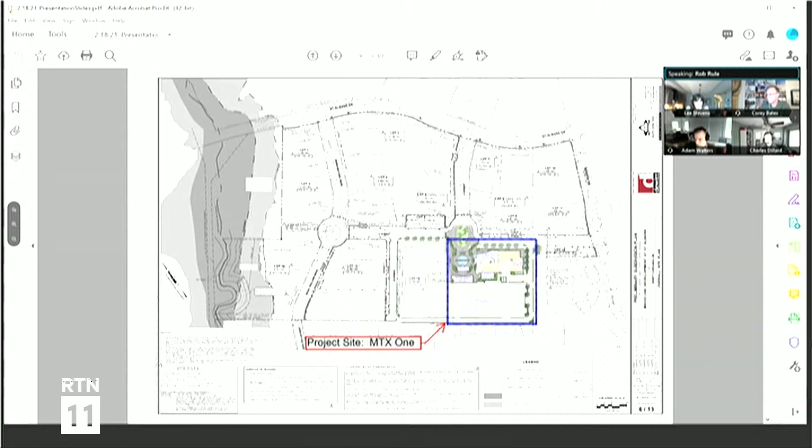As you move around to the right of the motor court, to the east, is the main entry, where the lobby is in the light yellow color. Most everybody from the parking deck would come through that area to the office building, passing an outdoor work area space, a small pocket park labeled on the plan, and get into the office lobby space.

And then they would come around into the main building circulation from there. In the darker tan area is the retail space that basically, for all intents and purposes, on every publicly viewed side of this project, there's active space on every street front with floor-to-ceiling glass.

In the case where the lobby is, it's 30 feet tall. You'll also notice on this plan that the building is not a simple rectangle. The building has bends in it, it has notches in it, and those are very important areas we're creating for outdoor gathering spaces. The one on the far right, for instance, off the retail, can become an outdoor dining space.

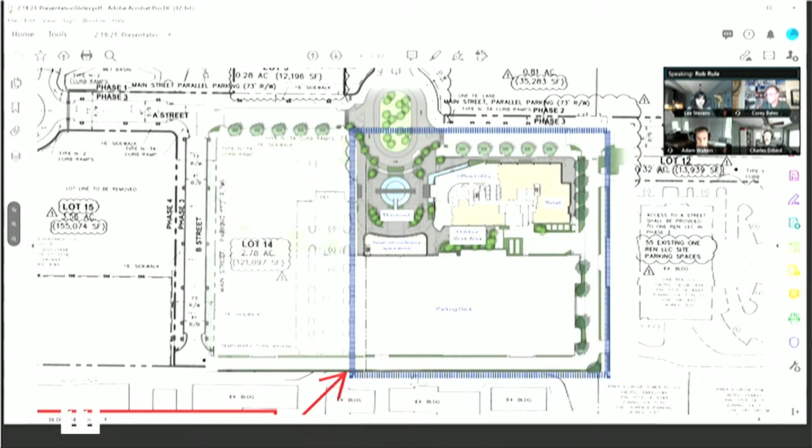And then all along the northern frontage, there's actually a recess. The glass is recessed behind the columns. We've got exposed columns there, nicely wrapped in architectural pre-finished metal finishes, and there would be cover there, so there could be some cafe tables and chairs and seating and lighting and all the things you like to have along a nice street environment with a wide sidewalk.

And then as you come back over to the office lobby, you can see the big bend with the glass line pulled back, creating an outdoor space in the dark gray area. The idea is that the indoor and outdoor space are blended here. In fact, the glass is so transparent here, we want this to feel like the indoor and outdoor are one. As you drive up from the motor court, you can actually see right into the lobby, and you'll see that curve at the core element.

That's going to be something pretty special. You've probably seen the renderings. We're making this a very sculptural, wonderful element, especially in the evening, but in the mornings when people arrive, it's going to be a really well lit space that's very transparent and exciting. A lot of energy and lots of people moving through from the parking deck all around that element every day, in and out. A lot of movement going through there, which is going to be great.

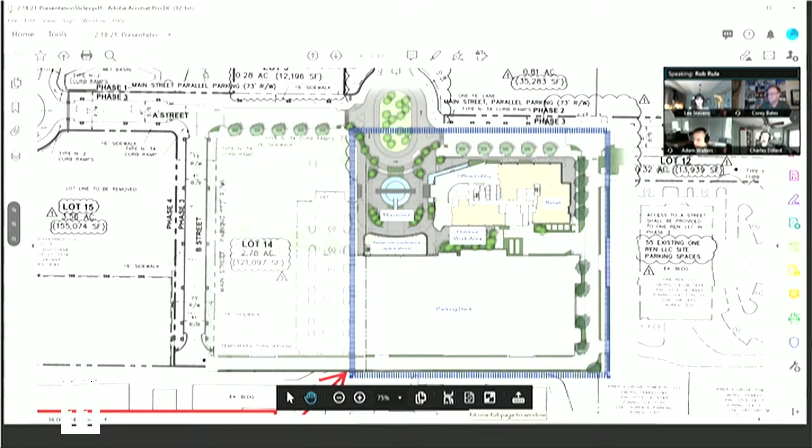So that's the site. If we want to move to the next slide, there's an elevation we can look at, and even some renderings. You can flip through those as you would like. Maybe the elevation would be a good point to start if you want to zoom in on that.

What I'll talk about is the building itself is a very sculptural composition. Although it's done in a very untraditional way, it does have a base, middle, and a top. You can see the base. The base is very clear.

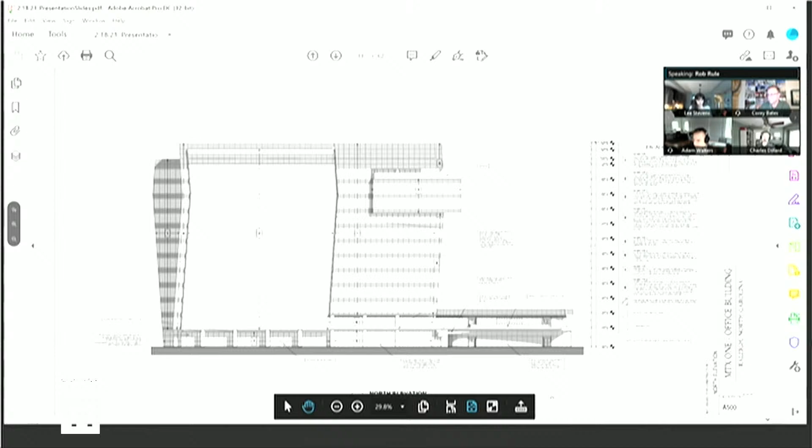We've recessed the first floor glass, as I mentioned. You saw that in the plan. You see the expressed columns. You see that some are 1 story, some are 2 stories. You see the canopy. There's a lot of visual interest with shadowing and with depth at the base.

And as it comes around the motor court, you can see that 2-story space with the canopy, with the terrace that sits above it, where the conference space is on the right-hand side of this drawing. Lots of interest, articulation, shadow lines, materiality with metal and glass, and there's even a little bit of a stone base you can't quite see here, but at the very bottom couple feet, there's actually really nice, beautiful granite down there. So there's a lot of rich materials, and it does have a base.

Then of course the middle has fairly conventional components with a combination of glass curtain wall on the right portion, and then also glass window wall with precast horizontal banding, but done in a very unconventional way as the building undulates as it moves up. It bends vertically the same way you saw it bend horizontally in plan, but it has vertical bends on multiple sides of the building.

And then the top is also very unconventional as well, but it does have a top. It's not your conventional cornice or top hat, but it does reach up, and the top floor is recessed. On the right-hand side, there's a dramatic inset area creating an outdoor, essentially not a rooftop terrace, but it's the top floor terrace, kind of like a rooftop terrace. But that's supported by shifting the building, letting the building move out on the 2 floors below that, and shifting off the grid, if you will, and becoming something so significant it becomes what your eye's drawn to.

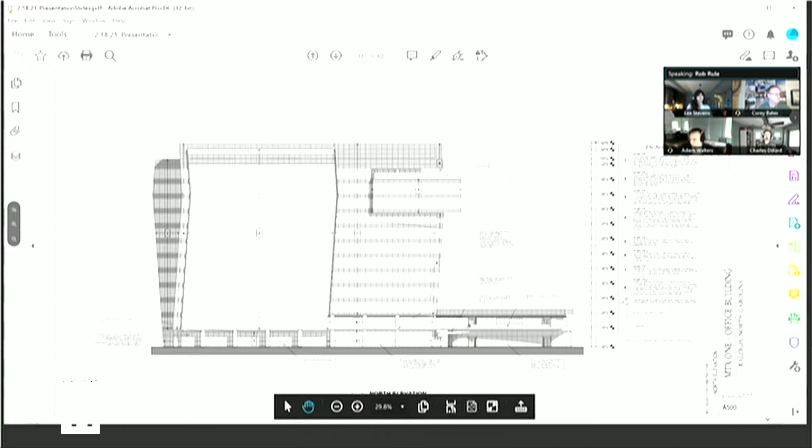So obviously the massing of the building—please do flip through these renderings at your leisure. But obviously the massing was conceived for this project without the UDO prescribed step back that was mentioned along the northern face. The only place where it's required would be along the northern face, which is the left-hand side of the view we're seeing right there.

But what I would tell you is that I am confident that the design meets the intent of all of the administrative alternate findings. Most notably, I would contend that the building does not degrade the pedestrian comfort level at the ground level in terms of wind and sunlight, which are the two criteria mentioned in the UDO. The reason I say that is we've actually studied the effect of these bent building planes, both in the vertical and the horizontal direction, and the effect they have on wind and sunlight.

We've looked at solar studies, and we've looked at wind tunnel testing. We've compared a building like this with the bent planes to a rectangular footprint of what the UDO prescribes by right, and compared the two.

And what we found is, when you look at those kind of strategies that were employed on this building, by right we could have a 20-story building that's a rectangle on this site, sitting on this corner. It could be 8 stories taller, and albeit we could incorporate that step back anywhere between the 3rd and the 8th floor, or 3rd and 7th floor.

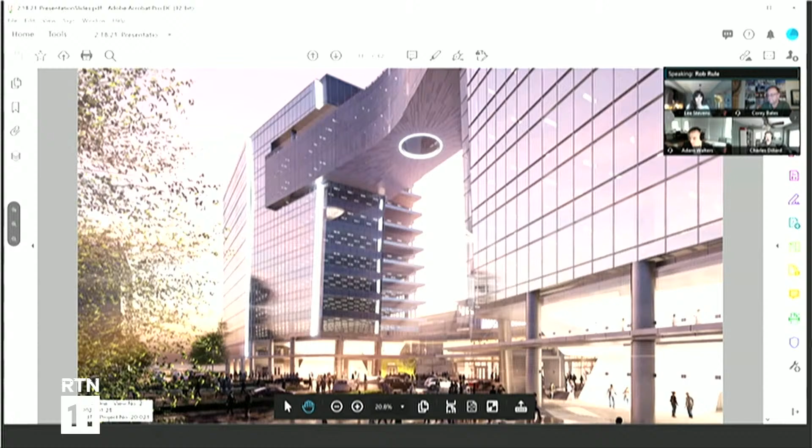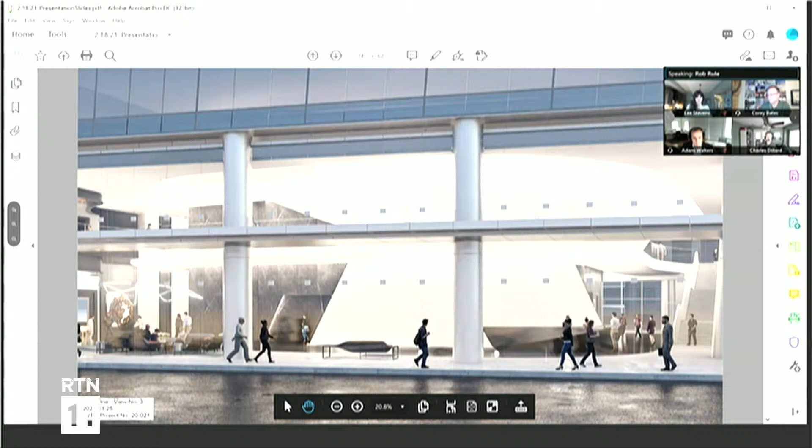And so we think that helped us with the strategy of coming up with something we wanted. We're looking for an iconic building, one that has this sculptural drama that we have here, something that addresses a potential phase 2 in a meaningful way as well, but still holds up as a phase 1 only building. It works both ways, and that's the beauty of this design.

So that's one thing. The other thing that was talked about was the transparency, and subsequent to the submittal of our application, we have been working with Viracon, who's the glass manufacturer and supplier, and an internationally known brand. Many of you as architects know who they are and you've dealt with them. What we have actually determined, and they've looked into this now, we just got word as of latest today.

Basically, we found out that we really don't necessarily have an issue, a technical issue that we need to ask for an alternate finding on. While the glass we submitted is technically only 76% transparent, which is 4% less than the prescribed 80% by the UDO, its reflectance is only 12%, which is 3% less than the prescribed UDO at 15%.

So what Viracon has done is analyze that, and they've said that the influence of a small percentage of reflectance has a greater impact on overall visual clearness of glass, the visual transparency, than a small percentage of the visible light that actually goes through the glass, which is what the measure of transparency is. So these are all technical terms.

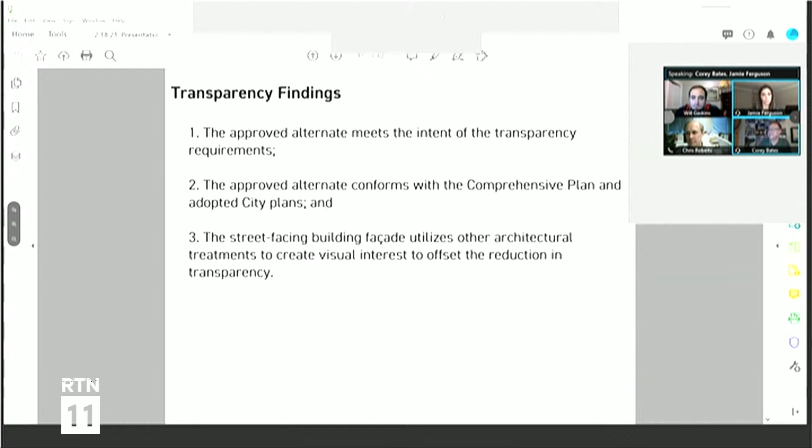Let's go ahead and look at our building massing.

All right, so we have 5 findings here. The approved alternate meets the intent of the building massing regulations. The intent of the building massing regulations is to manage the impact of tall buildings located near public right-of-way. Step backs are intended to provide access to light and air, street level mitigation, wind impacts, produce a consistent street wall, and visually reduce the perceived scale.

Again, I think with the angle and everything, we're all in agreement. Yeah, I'd actually like to commend that design team for engaging somebody to look at the wind and the wind tunnel effect for this project. As you can see, when phase 2 comes along, that could be a pretty big concern, especially with having outdoor balconies for the conferencing space and things like that. So well done. Yeah, thanks, Chris, for that.

Let's look at number 3. The approved alternate uses a change in building materials to mimic change in wall plane. The most substantial and durable materials are located at the bottom floor. Of course, we have those nice columns, kind of a nice base at the bottom, window setback. If the approved alternate proposes a building setback behind sidewalk in lieu of a required step back, the resulting open space includes public amenities such as seating areas, trees, and landscaping, outdoor dining, which it does. Building contains architectural treatments for delineating the base, middle, and top of the building, which Jamie has alluded to earlier, which I agree as well.

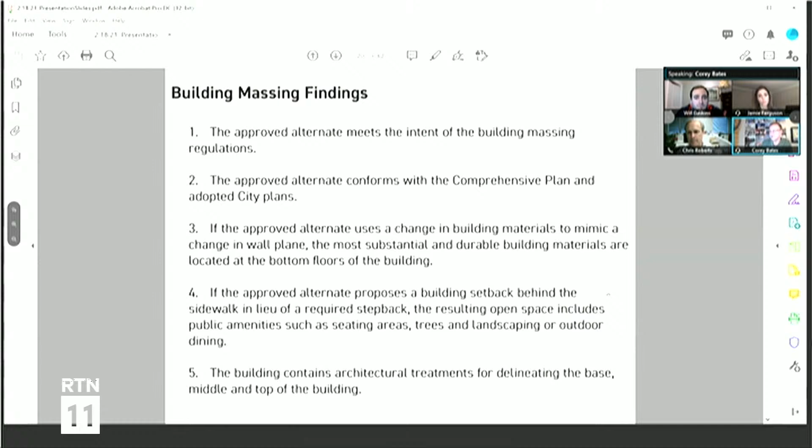So back to the approved alternate meets the intent of the comprehensive plan. Can we substantiate that with some policies as well? Policy UD 1.3, attractive facades. UD 1.2, architectural features. LU 2.1, placemaking. UD 2.4.

Okay, all right. With that being said, do we have a motion? I'll move to approve. Second. We have a first, and Jamie is a second. All right, all in favor? All right, any opposed? Being none opposed, they are approved. We appreciate it, great project. We appreciate you bringing that in front of us today.

All right, let's move right into AAD, case number 2, AAD 4-21. It's 3201 New Bern Avenue. We have, I believe, one participant, Marty Lynn, as the applicant today. And Lee, are you also presenting this one as well? I am, yes. Thank you, Chair. So 3201 New Bern Avenue is here for an alternate for vehicle parking lot landscaping.

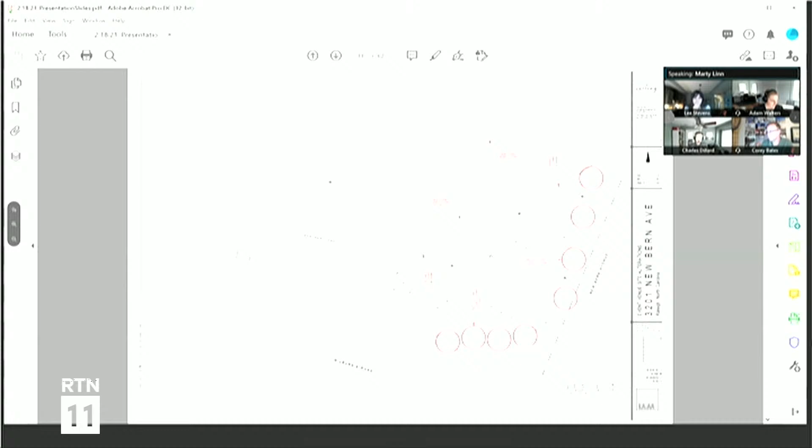So I'll reference the last plan in the set that was provided to all of you, which has the trees that would normally go in those islands shown in red, dashed red circles. You can see that we're proposing to relocate those trees to the edge of the parking lot, as shown by the circles that are not dashed, the thicker lined red circles. Those are where we're proposing to move the 8 trees that are impacted by the existing floodway.

As Lee said, also to respond to having those trees come out of those islands, as we're proposing, we plan to put in a very low level ground cover, a viney kind of ground cover. I think we submitted that we would consider something like a euonymus, a winter creeper type ground cover that will handle any potential erosion issues related to those islands, and also provide some aesthetic in terms of greenery to the parking lot.

So with that, that's basically the gist of it. Great, thank you, Marty. Any questions for the applicant from the commission?

Yeah, I just have one. Looks like the 4 plants south are pretty close together compared to the ones on the east. Is there any reason why those are bunched closer versus maybe putting one of those 4 onto the east side and spreading them out a little more? Sliding them to, the 4 that are grouped together, taking one of them and putting it where?

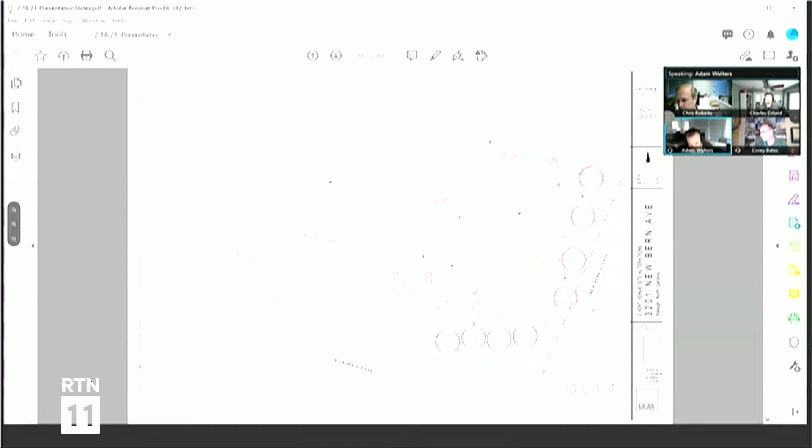Yeah, so is it Marty? I see that. You really can't fit any more on the New Bern Avenue side. And I don't know if you can match the spacing on the Milburnie Road side a little closer to what you've got on the New Bern Avenue, so it seems like a consistent row of trees. I assume they're all the same species. They are all the same species.

We can try to pull a tree maybe towards the building more. We have this retaining wall in there. We've got a pretty steep slope dropping from Milburnie down to the site, as we do from New Bern as well. If you're familiar with the site, this thing's pretty much in a hole. But we can certainly try to move that one tree to the other end of the retaining wall if that works. Yeah, I'll spread those other ones out a little bit more.

You're probably not going to be able to move it much, but it's a good point. I mean, Chris comes up with... I was going to say, I see what you're doing by trying to take the 8 trees that would have been in the islands anyways and put them on their edges, but would it be better to lose 1 and just do 7 and give them a little more space?

Adam? Yeah, or put one somewhere else along the Milburnie Road if it's, I think, yeah, the one that's squeezed up against that retaining wall looks kind of out of place. I think the 3 on the Milburnie Road side look too close to the curb, but generally in that area, maybe you could take one and put it on the other side of the entry drive or something.

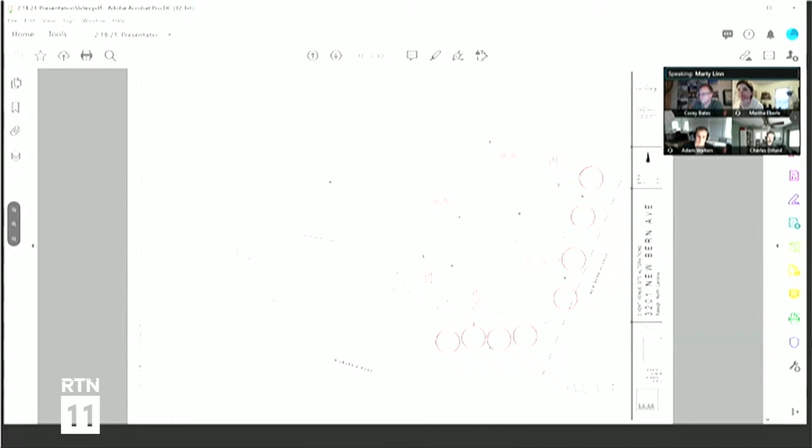Well, I don't know. We haven't tested that with stormwater. I am a little concerned, which is why I think we put in our document contingent upon their review, because I don't know how they're going to respond. They've been very particular about our pavement renovations. Basically we cannot raise the pavement at all, so any renovation we do we'll have to grind, or do some kind of work where we're not raising the elevation of the pavement, and we couldn't do raised curbs, so we're doing flush curbs. So I don't know how they're going to react to anything we put in those islands, but we were going to try.

I was also curious, just looking at the street view here, it looks like there's some pretty big pine trees along, I guess, just right behind where the four trees we've been talking about are. Are those going to stay? They are, there's room in there. It doesn't look like much room, but there's certainly room. Fortunately the sun is going away from those pine trees instead of behind them, so these trees will get good light.

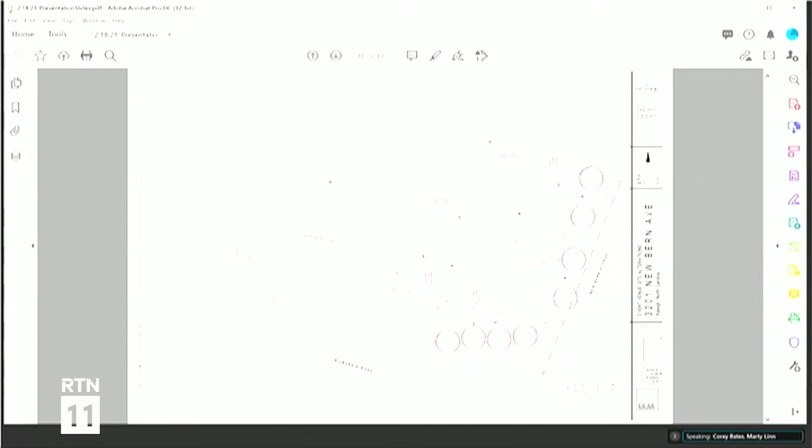It's a little bit out of my element, but so the floodway, is this entire site in the floodplain? No, the line that I've labeled is the floodway itself. Well you said floodplain, right? Floodplain, because floodway is the actual current of the stream in the 100-year, and your floodplain would be the 100-year, right? Right. So this other line, there's another line just under the Milburnie Road label. Yep, that's the 0.2% thing or whatever. That's right. Yeah, so the whole site's almost entirely in the floodplain. Right.

I would question if they'd allow them to put anything in those islands, but it would be nice to put something small in there if possible. But I'd question if they're going to allow them to do anything in there.

Okay, well, are there any other questions for applicant or for staff? Being none, I understand there's nobody to speak from the general public either on this one. So I'll go ahead and close this and open it up for discussion amongst the commission.

I'll just open up and say, I'm not a landscape architect, but it looks like they've done pretty much what they can do. It's making it better than what it is now. My thought is that I would rather see a more consistent spacing, so I'd almost rather see a tree lost and have these spaced out a little better, have 3 on that Milburnie kind of side. But leave that up to the professionals.

I'll make a motion to approve. Okay, Adam, have a second? I'll second. Chair, I believe we need to go through this line. Let's go through that really quick.

So the approved administrative alternate meets the intent of the vehicle parking lot regulations. The approved alternate is considered equal to or better than the standard, which I believe it does. And then the approved administrative alternate conforms with the comprehensive plan and adopted city plan. So we need to substantiate this. Let's see what we can find here.

Yeah, UD 5.1, contextual design. T 6.9. That's 2. I think, does that work, Lee? We have 2. Yeah, that works. I think that's fine. Okay, so let's go back, we had a motion and a second.

Are those motion changed? Did you want to condition the removal of that tree to create a consistent spacing along Milburnie? Right. So Adam, does the—yeah? So now that we've gone through these policies, have you changed your mind? I think honestly, our feedback is probably enough. But if anybody feels like it's necessary to say get rid of it or space it out—I think whether he spaces it out or not, it meets the intent of the code.

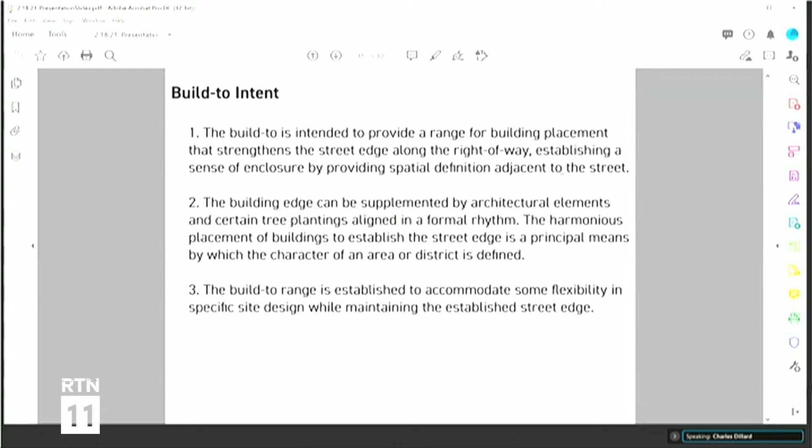So I'll first read the summary for the AAD 5. Here the applicant is proposing to develop a new phase for Olde Towne subdivision with 305 townhome lots and open space common area lots on a currently undeveloped parcel along the future extension of Casota Lane and Off Rock Quarry Road. The property is zoned residential 10 units per acre with conditions. Zoning conditions pertain to TCZ 419, which amended the conditions associated with zoning case Z718, which pertain to the Old Town subdivision. Zoning conditions apply an overall unit limit for the Old Town subdivision and require new greenway trails to be built. This phase of development provides connectivity to proposed greenways in different phases of the project.

The townhome build-to is 10 feet and 55 feet, 70% of which must be occupied by building width. The corner build-to requirement is that the building be placed in the first 30 feet of the build-to along the street, extending from the block corner, and applies to each of the 10 build-to areas proposed for this alternate. These areas are highlighted in orange in the attached site plan, true for both of them. Each of the 10 identified areas proposed for an alternate fails to meet the 30-foot corner requirement, while all but one of the townhouse block faces fails to meet the 70% requirement for the build-to.

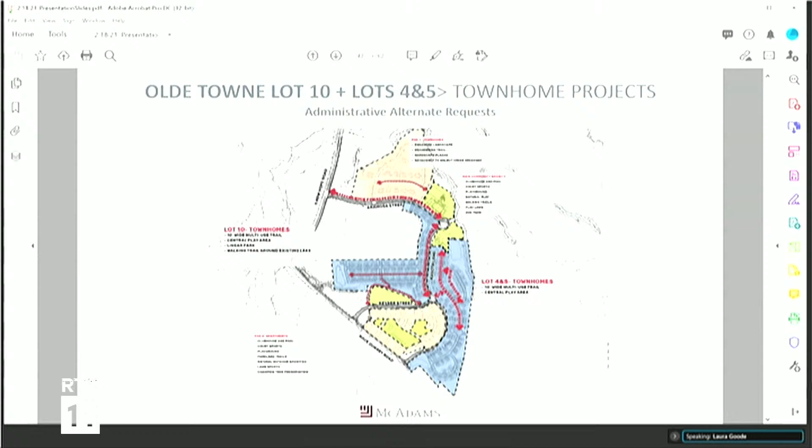Next slide, please. So we'll give a brief project summary, then we'll go over the required findings, and then we will explain our proposed alternates.

Next slide, please. These cases focus on two townhome portions of the overall Old Town development. The first, for lots 4 and 5, is case AAD-5-21, involving about 305 townhomes on 49 acres along Kasota Lane, one of the main roads that runs through the Old Town development.

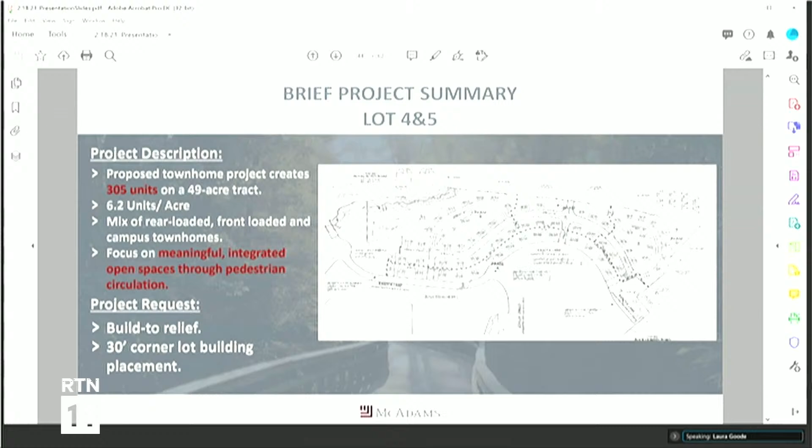Now, what you're seeing on this slide is rotated 90 degrees. So the roundabout shown on the left side of the screen is actually north, and the far right is south. It's just to orient you there, it's turned 90 degrees to the west, I guess.

Next slide, please. The second case, AAD-6-21, for lot 10, involves about 206 townhomes on 35.7 acres, which is along the other side of Kasota Lane from the first case, and also has some frontage along Kaiser Street.

Overall, a significant part of the project, both in area and design, consists of open space. The overall open space framework focuses on meaningful open space and outdoor spaces, both in quality and in quantity. However, as we worked on placing the townhomes, we found we could not meet the build-to requirements and the street layout requirements of the UDO, and needed to address the intent of these sections in other ways.

So accordingly, we are seeking relief from the build-to requirements of UDO sections 1.5.6 and 2.2.3.E2 to reduce the required 70% building width in the primary build-to, and from 1.5.6.C.1 to remove the requirement to anchor a building within the first 30 feet of a block corner. At this time, I'd like to have Mr. Vampran speak on how we are addressing each of the required findings and to discuss our proposed alternates in more detail.

Hey, good afternoon. This is Michael Vampran. I'll take a quick opportunity to talk through some of the townhouse products we're showing here and set the stage for the overall character. So Kasota is the primary north-south movement there, and we're actually proposing rear-loaded townhomes along that main drive, both for lots 4 and 5 and for lot 10.

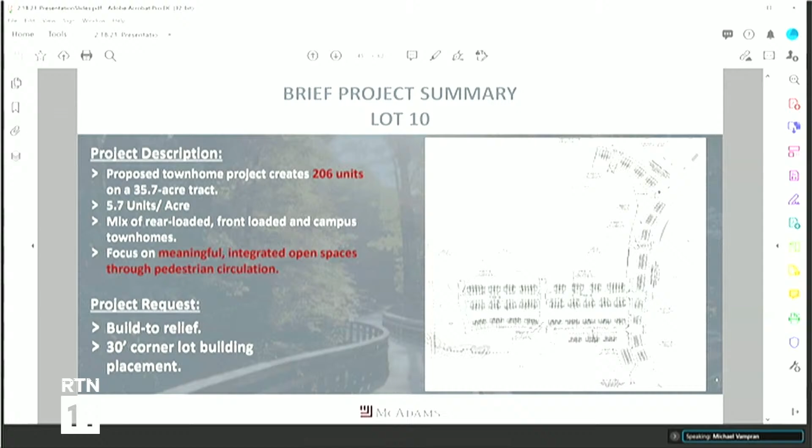The idea behind us not meeting the corner lot build-to standards stems from two primary things: we're required to have 20 feet of separation from a driveway to the point of tangency of a right-of-way. So sometimes we're able to put the driveway, but we're required to put it a certain distance away. When we aren't able to place that driveway closer than 20 feet, we're not physically able to put that building within the first 30 feet.

For some of the product types where we do have that rear-loaded product type, we are able to actually meet that standard. So in the following slides, you'll see where we are able to meet some and we aren't able to meet some. It stems from those different townhouse types. So there's that general requirement, and in some areas, we simply wanted more open space adjacent to those road intersections. Next slide, please.

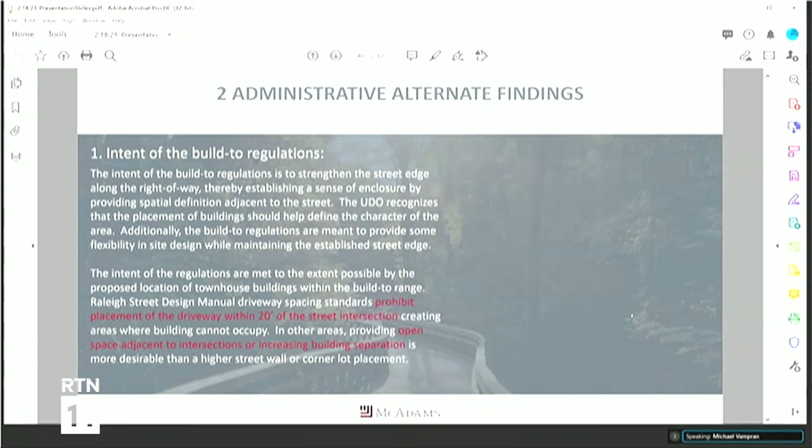We believe we meet several of the comprehensive plan statements: placemaking, corridor development, activating the street, neighborhood connectivity, and overall pedestrian networks. Our solution is where a private lot from a townhouse directly abuts the intersection of a right-of-way, we're proposing landscape easements in that place. Where we do have public space, we're proposing common open space or outdoor amenity area. So where we're able to provide outdoor amenity area, we are; where we're not, we're doing landscape. They'll make more sense in the next few slides.

Regarding the change in percentage of the building that occupies the build-to area, we believe we're substantially meeting the intent of the build-to requirements, and through the outdoor amenity area and the landscape easements, we believe we're satisfying that.

Now we'll get to the meat of it. The yellow areas shown are where we have private lots that abut the intersections of two public streets — for lots 4 and 5, that's where we're proposing landscape easements between the building face and the public right-of-way, and you'll see what we're proposing down the road. In blue is where we're actually able to provide that common open space or outdoor amenity area. So there are two different typologies we're proposing to meet that corner lot building placement.

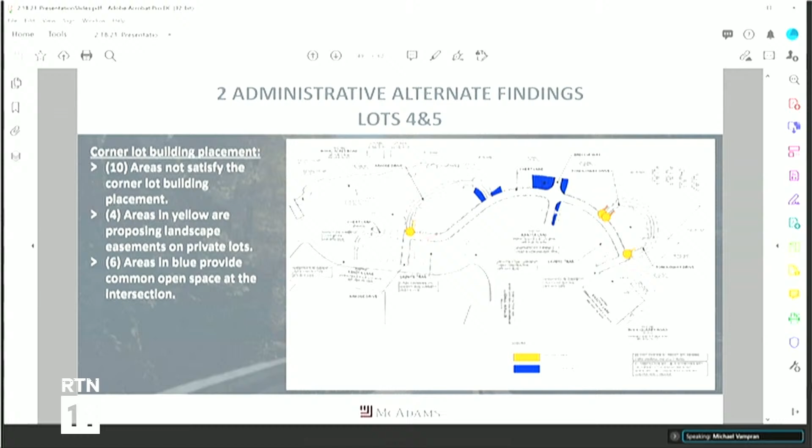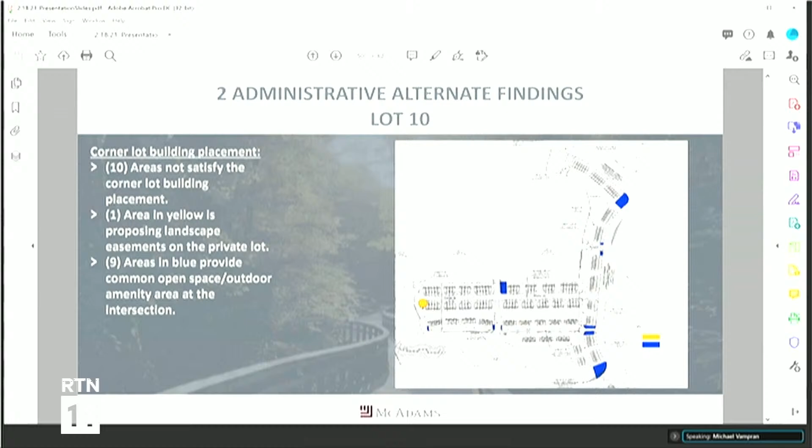We'll move along to the build-to requirements and what we're showing here. Starting south, or page right, we proposed apartments adjacent to it, so we felt it was more appropriate to have more building spacing between these townhouse units, flanking those apartment units, to provide a more compatible building relationship there. You can see that 69% there is very close to the 70%.

If you go page left near the roundabout, you see 51 and 55% build-to — it would be closer to that 69, 65% if not for the connecting trail we're proposing right at the roundabout, which is what's lowering that build-to. All along Kasota Lane, those are the rear-loaded townhomes — as you're driving in, we pulled all the driveways off of that road and tucked them behind the building.

The idea is to have a lot of open space, both between the townhouse units and between the townhouse units and the public street, to mirror what's going on with the apartments page south. Once you move internal to the site, you move to the front-loaded townhouse units on Street A, and those have around a 64 to 65% build-to standard, stemming from the idea of embedding more open space between these townhouse units.

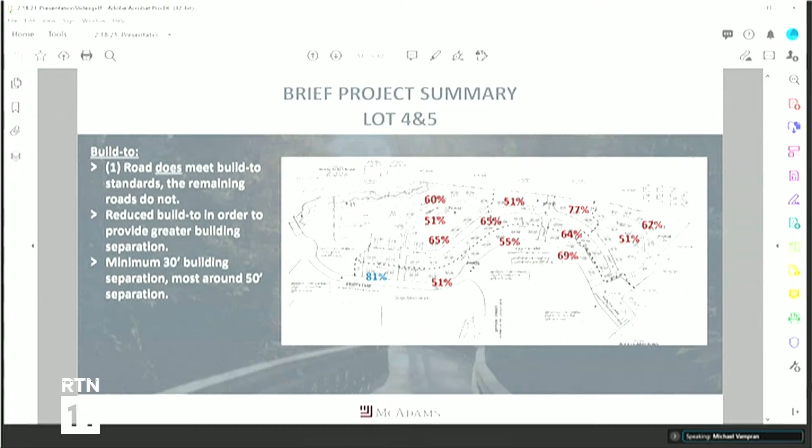So we're going to go to lot 10 to the west, and generally we are hitting the build-to requirements in all these areas. Starting from page right, those are the rear-loaded townhomes where we don't have a lot of the curvilinear road networks, roundabouts, and trails bisecting the area, and we're able to hit that 70% build-to standard.

The one area where we aren't able to hit it for this area is all the way to the page south, where we abut an existing lake. The lake, which we'll show you in a second, is about 3.5 acres, and we're trying to have a more intentional connection to it via walking trails.

That's also where the mail CBU is located, so the idea is you'd come get your mail there, and in theory you'd be able to walk there through all the trails. So that's the one area for lot 10 where we aren't hitting the build-to, and it's about 50% of the frontage of that public street.

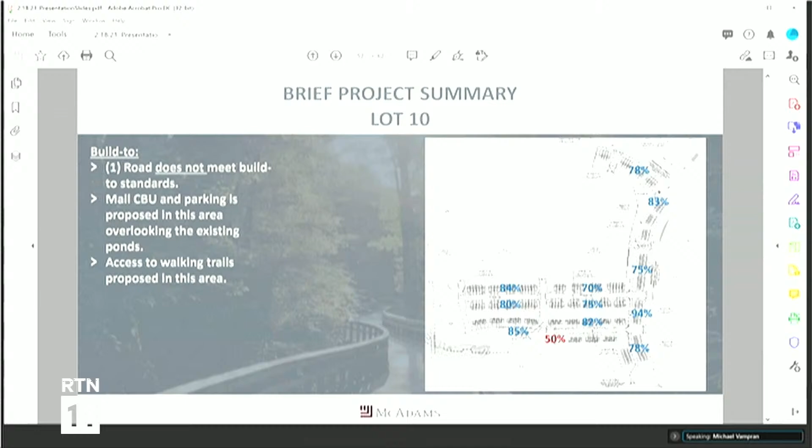So I'll walk into our proposed alternates now, starting from page north. As Laura mentioned, this is a very similar request. Along Anamosa Street, during the rezoning for this property, we worked with the City of Raleigh to best understand the ultimate connectivity to Walnut Creek Greenway.

The idea was not to put it in the floodplain, but along the street. So we have a 12-foot multi-use trail that runs along Anamosa Street, which will ultimately extend east out to Barwell, connecting down to the school there. So you have this 12-foot multi-use City of Raleigh Greenway trail extending along the public street.

Walking down from that northern roundabout, we're proposing a 10-foot wide multi-use trail along the street. For lots 10, the build-to percentage is being met, but they front this 10-foot wide multi-use trail, which walks down to the central roundabout and then into lots 4 and 5.

That larger dashed line is the 10-foot wide multi-use trail we're proposing internal to the site. We're proposing connectivity internal to the site via this path, which walks along the road and through some of the open spaces we're proposing, trying to connect people via these open spaces with larger pedestrian connections.

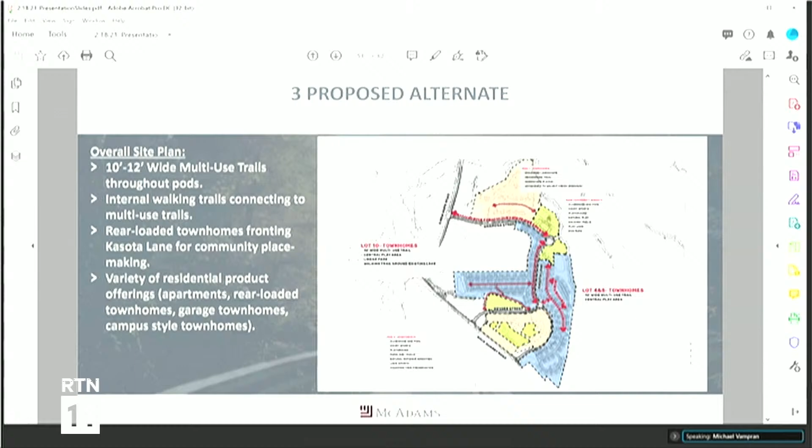We'll zoom into a more site-specific solution for lots 4 and 5, where we weren't meeting the majority of the corner lot building placement standards. Where we abut the lot to the public right-of-way, we're simply proposing a landscape easement with foundational landscaping that softens the building wall and eases the transition between the right-of-way and the building.

In some of these larger areas, we're proposing a different solution to create more of an experience as you drive into these sites. Along Breco Way, we're proposing to enhance the roundabout with understory trees and native grasses to provide a visual focal point. On the page right, we're proposing passive walking trails and a passive pocket park with trash receptacles and benches.

We are proposing additional screening for the parking lot being proposed there. You can see that's where the mail CBU is located, so you drive in and have an opportunity to stop at the CBU. We are proposing additional screening and passive park screening for that parking area and the CBU, noting that's where a building would be, but we're putting a parking lot and CBU instead.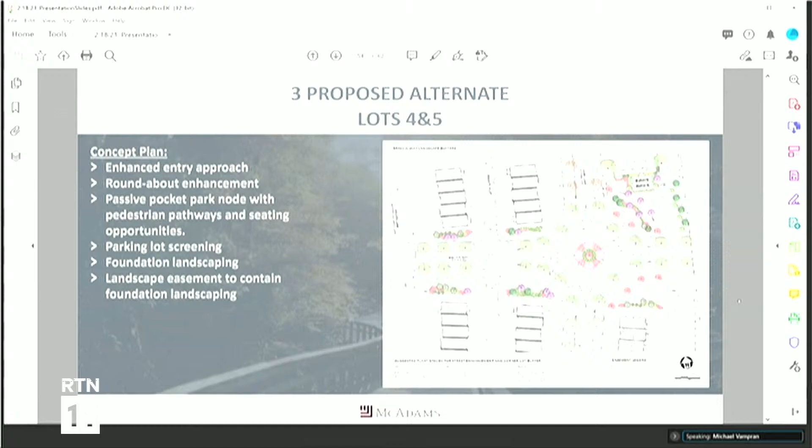This is all the way up in the north, adjacent to the primary clubhouse. There's a 10-foot use trail that walks through it and crosses to the north, ultimately connecting to the City of Raleigh's On Street Greenway Trail.

In this area, we're proposing to enhance the roundabout. We're putting in a 4-inch caliper, 14-foot tree at the center, and proposing turf along with some ornamental grasses and shrubs within that area.

For the corner lot building placement, we're taking a passive approach with a passive pocket park, proposing meandering walking trails, benches, and trash receptacles.

One of the cool things is that there's an abundance of natural stone on site, hence the name Rock Quarry Road. Throughout this process, while installing the roads, we've actually been pulling up a lot of boulders out there and trying to arrange them at these intersections, using this natural stone found on site and tucking it into these landscape areas.

That's how we're addressing this corner lot, through this passive park opportunity. It connects to the larger active recreational opportunities—to the north is the main clubhouse, and to the south you have the dog park and some more passive opportunities. That's how we're addressing the corner lot in this particular instance.

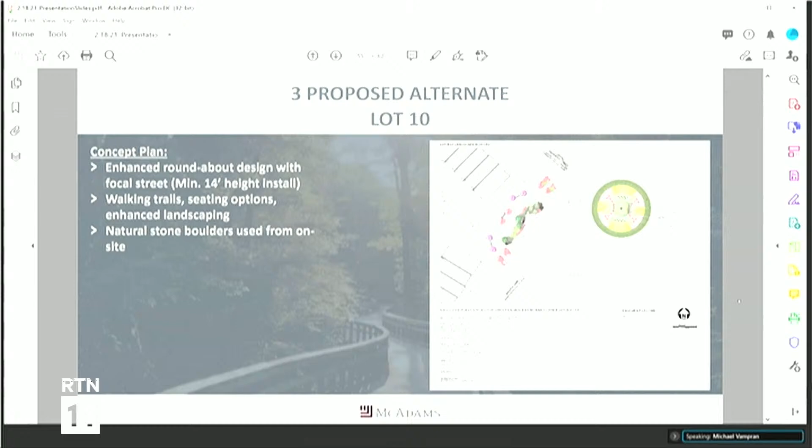Next slide, please. And this zooms down further into lot 10.

This zooms in on the 8-foot wide trail that walks between the townhouse units. So you'd be able to walk out your back door, hop onto the trail, and then go onto this much larger trail system or go down to the pond.

In this particular area, we're proposing some additional hardscape spaces. We have a little pedestrian node along the trail, and we're proposing benches, native trees, and understory grasses and shrubs.

We feel like we're proposing appropriate landscape easements with the foundational plant material. Again, where we aren't able to anchor the building at the intersection, we're proposing this landscaping to help soften the edge.

And a much larger view—I feel like we're addressing the corner lot building placement standards through these passive parks or pedestrian nodes. So I believe that's it. If you go to the next slide.

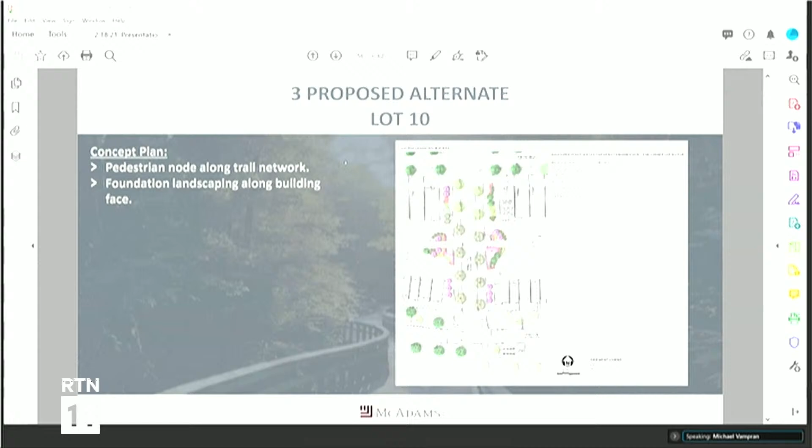Thank you, and we're all open for questions.

Thank you very much for that presentation. Any questions from the commission for the applicants?

Any other questions for staff while we're here? Being none, I understand there's nobody from the general public to speak on this one as well, so I'll go ahead and close it and open it up for discussion between the commission members.

I'd just like to say I really appreciate the thorough presentation, lots of details and explanation, really getting at how what they're doing meets the intent of the code. And this is really similar to the one we approved earlier on, as stated previously.

I would agree with those comments, and add that they've got some hardship between driveways and intersections they're dealing with that I think have been addressed really nicely with the landscaping easements. I do think it's consistent with the previous case last year that we approved. Honestly, I would prefer to see more spacing between the townhouses than the 70% frontage we've got in the code. I like having more space between them as well.

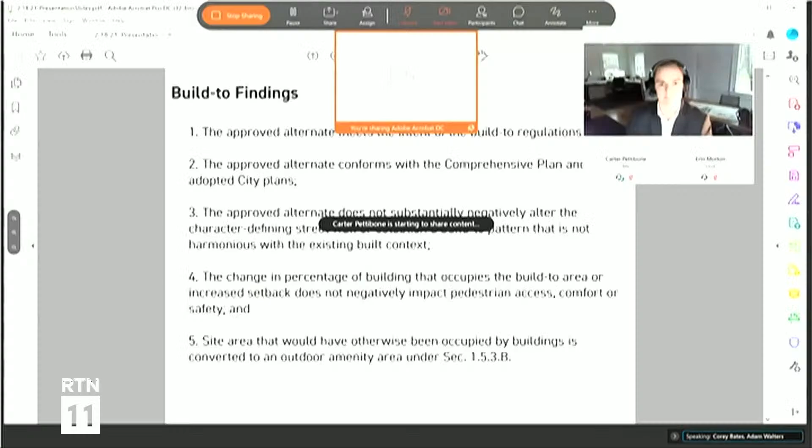Should we look at the findings? Let's look at the findings. If we could pull up the... here we go. The approved alternate meets the intent of the build-to regulations.

I believe it does. The approved alternate conforms with the comprehensive plan. We can look at that in a minute. The approved alternate does not substantially negatively alter the character-defining street wall or established build-to pattern. It's not harmonious, it's quite the opposite. The change of percentage of building that occupies the build-to area or increased setback does not negatively impact pedestrian access. Again, I think it helps. And the site area that would have otherwise been occupied by buildings is converted to outdoor amenity, which I believe it does.

So let's look at some findings to substantiate. Again, LU 2.1, placemaking, UD 5.4, UD 2.3, UD 5.4. All of them. I'm just kidding.

Okay, and I'm looking at these policies, unless you guys want to break these out separately. I'm looking at these policies for both projects, but we'll vote separately if that's okay. Yeah. All right, so I think that's good. Do we have a motion?

I make a motion to approve. Okay, we have a motion from Adam, I'll get a second from Jamie. Was Jamie, were you raising your hand? Did I see? Either of us, yes. We'll go with Jamie, so we have a second with Jamie. All in favor, we're looking at A85-21, so it's 2201 and 2361 Casota Lane. All in favor, say, raise your hand.